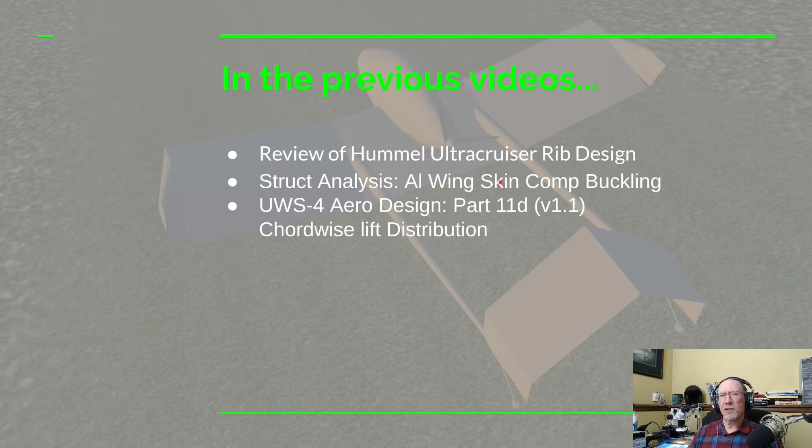And in that structural analysis video, we looked at the skin compression loading, what it can handle, and buckling load for an aluminum skin right at the spar. I'll give you a link to this one when we talk about it a little more, because I actually pulled one of the slides out of there and put it in this one. Another video that we're going to be using a slide from is the UWS-4 Aero Design Part 11D. In that one, we talked about chordwise lift distribution or chordwise pressure distribution. When we start talking about that, I'll put a link up here in the upper right-hand corner.

Now for the purposes of our analysis, we're going to assume that the loads that the skins are encountering are being transferred to the rib and then from the rib to the spar. Now it's not quite strictly true. Some of the skin loads here near the spar are going to be transferred directly to the spar. But to be conservative, we're going to assume they go to the rib and then to the spar.

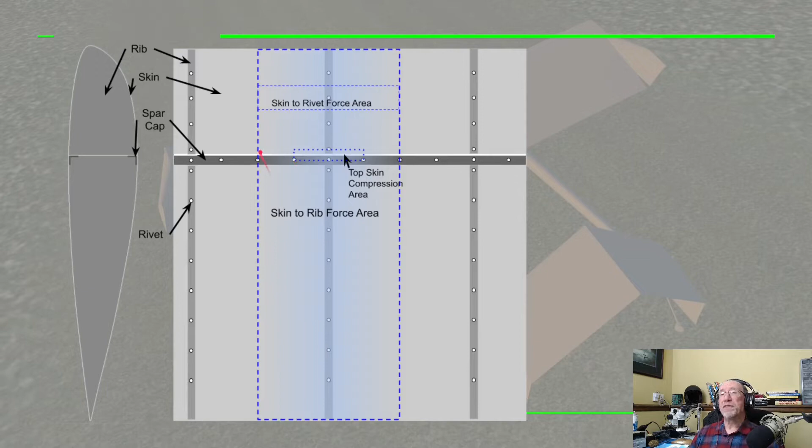So what we need to do is figure out the distance between this rivet that goes through the spar cap and the next one out on the nose rib, and in the other direction out to the main rib. How far apart can we put those and still have that skin carry that compression load? So that'll be one of the distances we're going to figure out.

Now another distance we need to figure out on these rivets is out here on the ribs. Same thing on the main rib. We're going to have more rivets out here. So what's the distance going to be between those rivets? What's going to determine that distance is from another video I forgot to mention before.

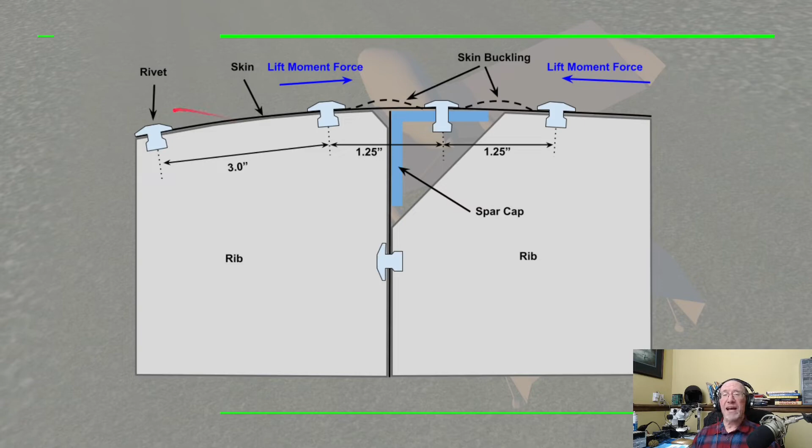In brief, there's going to be suction on the top of this rib up here. And so that suction force is going to try to lift up. That force is going to have to be transferred to the rivet into a flange on the ribs. Now, the farther apart these rivets are, the more force each rivet's going to have to carry. And vice versa, the closer they are together, the less force they have to carry.

But the closer those rivets are together, the more rivets you have to put in the wing, so that adds more work and a little more weight too. So we like to have those rivets about as far apart as we can get them. Now, what we want to do is consider the worst case scenario on the load on this skin. So let's talk about that.

Now that brings us to another video that led into this one, and that's the chord-wise lift and pressure distribution.

Now the 117 falls in between these two, and it's almost the same as this one. So the 3-inch, I'm not comfortable. I don't think that'll work at all, because I'm guessing that compression that we can handle is probably around 70 pounds, probably something like that. So that's not good enough.

So what I want to do is try a 2-inch spacing and then do some testing to see if that will work. It's in between these two, kind of in the mid area, a little bit lower than midway. So I'm guessing that's going to work. So I'm going to do some testing to verify that, but we're going to try 2-inch spacing.

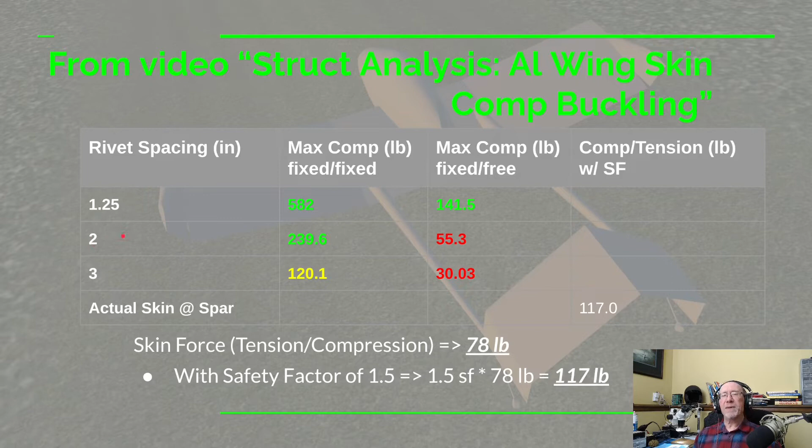So we've got part of our answer now. So the spacing from this rivet to this rivet will be 2 inches, and from this rivet to this rivet will be 2 inches. So we at least figured out 2 of our other rivet holes. I know where this rivet's going to be. I guess I should mention that.

So in order to be able to handle about a 3/4 inch top flange, I'm going to put this rivet 3/8 of an inch from this edge here where the web is. So there'll be 3/8 from the middle of this rivet hole to this edge of the angle. So I know where this rivet will be, this rivet, and this rivet, at least in our first test article. Well, now let's work on this rivet span out here.

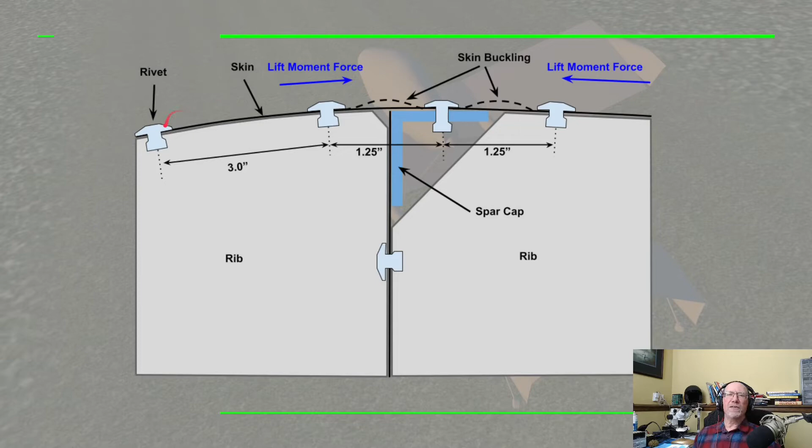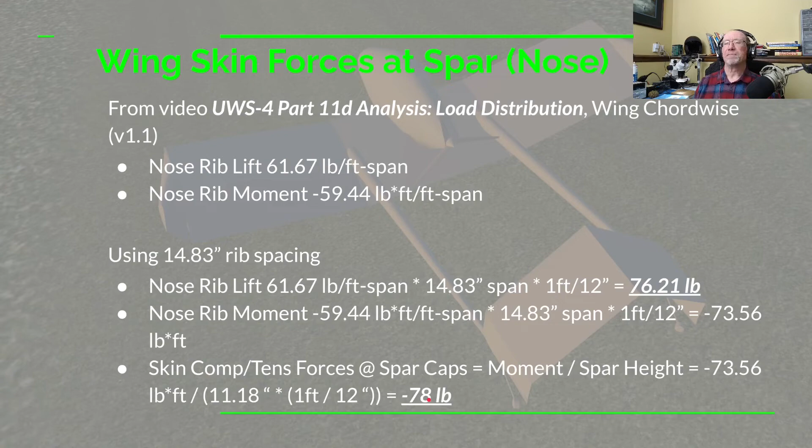And just to be complete, I did it for the main rib and the flaps too. And one thing about the flaps: loads are transferred to the wing at the rear spar through a hinge. So that means more than just that rivet bay spacing comes into account for the flap. So you actually have to take half of the flap span into account and load that into one of the hinges. And of course, those hinges are going to be placed at a rib. So those particular ribs are going to take a little bit more load due to flaps and ailerons.

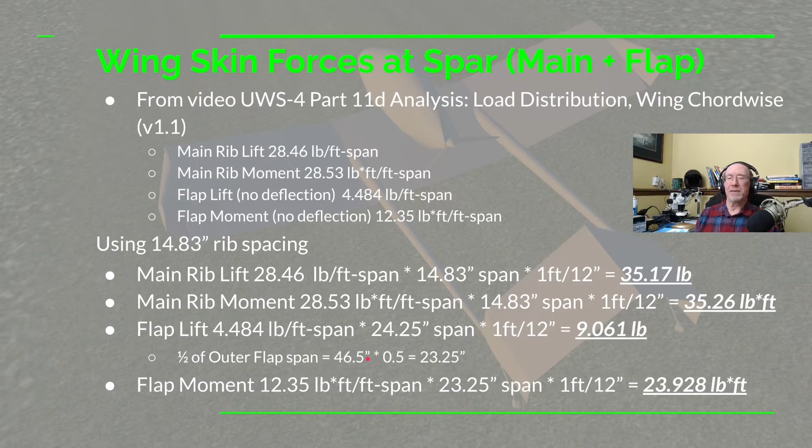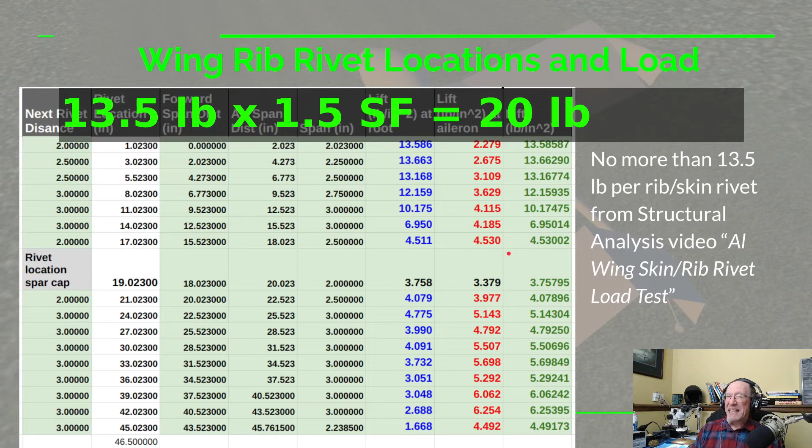You may remember from a recent video that I did, aluminum wingskin rib rivet load test, where I figured out that I didn't like putting more than 13.5 pounds of load on a rivet because it would permanently deform the rivet hole in the rib flange. But I was going to allow up to 20 pounds to just slightly deform it, which is allowed under Part 23.

Now I did all my chordwise load and pressure distributions in a spreadsheet. So it made it pretty easy to also use that same spreadsheet to figure out how far apart should I put those rivets in the rib skin junction. So that's what this table here is representing. So I have a rivet location that I already know. That's going to be that rivet that goes into the spar cap. Now it's at roughly 19 inches away from the leading edge of the rib. So everything else goes from that.

So the next two rivets out, fore and aft, would be 2 inches away. And that's because of the skin compression load. So I already know where those two are, 17 inches and 21 inches. But now I need to figure out what the rest of these rivets are going to be.

So this column here, as you probably already figured out, this is the location of the rivets. Now this is the horizontal location. So that'd be the X direction, distance from the leading edge. It doesn't have anything to do with the vertical direction. This is the distance between the rivets, and I'll kind of ignore the rest of these columns here just to help me out in doing my calculations.

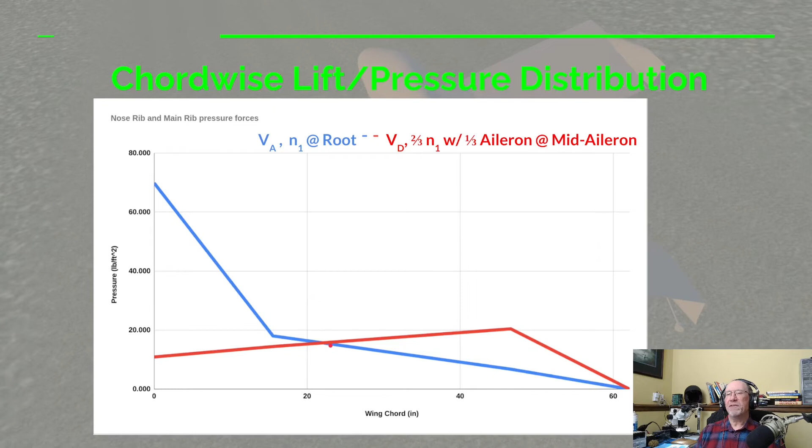But this blue column represents the loads from this blue line. And this red column is this red line here. So what I want to do is take the maximum load from this line back to here, and then from this red line back to the trailing edge. So I did all the calculations, and then this column is the max out of these two.

So what I did is I just manually played around with rivet placements. So you can see I got up to just a little bit over 13.5 pounds here on this first rivet, and it's only 1 inch back from the leading edge. So on the next rivet back, it's 2.5 inches back, and then all the rest of these are underneath. Now I only went to 3-inch spacing on all these, and this goes back roughly to the aft spar.

Now I only did a maximum of 3-inch spacing. I could have easily gone back to 4-inch spacing except for this one. These could have all gone up to 4-inch spacing with no problems, and I would have easily stayed underneath my 13 pounds per rivet. I think for now I'm going to stick with 3-inch spacing. Now 3-inch spacing is what Morry Hummel used on his ribs on the Ultra Cruiser. I decided to go a little bit closer together up here near the nose. And then, of course, right here at the spar cap. So I at least have some tentative rivet locations for the ribs.

Now this is going to allow me to use the same exact rivet locations throughout the wing. Now out at the tip, I could actually do a wider spacing out here on the nose because we're going to have less load out on the tip. If you remember on span loading, your span load drops down to 0 out at the tip. So we could easily do with far fewer rivets out at the tip if we wanted to.

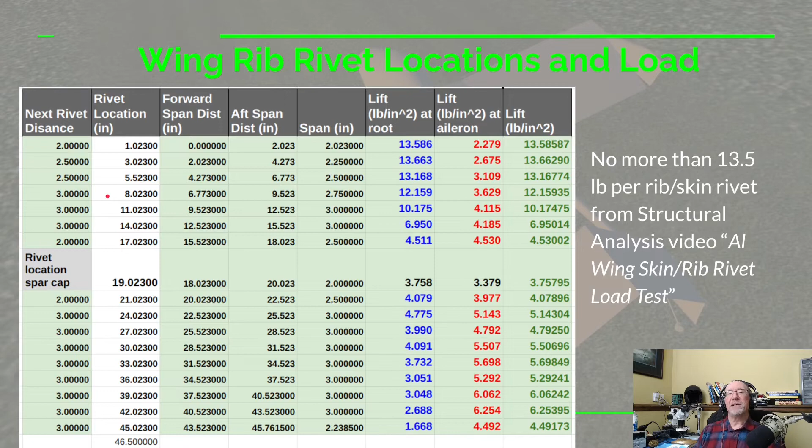So I at least have some tentative locations for the rivets and the skins going into the ribs, but what about here at the shear web? We're going to have some rivets carrying this lift load of the nose rib and the main rib into the shear web of the spar. So there's going to have to be some rivets to carry that load.

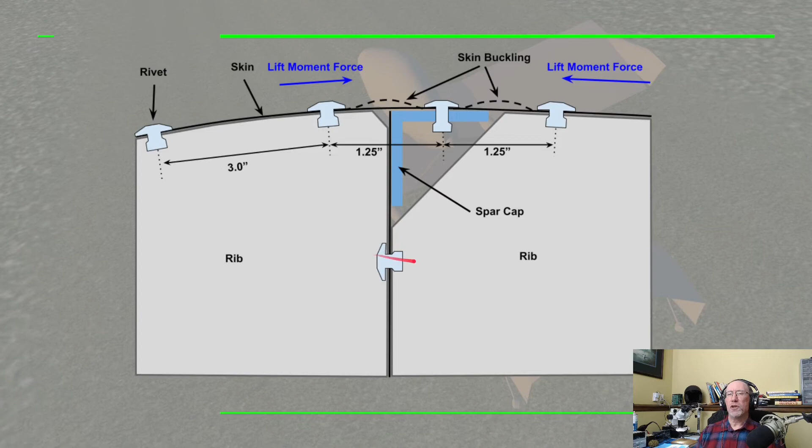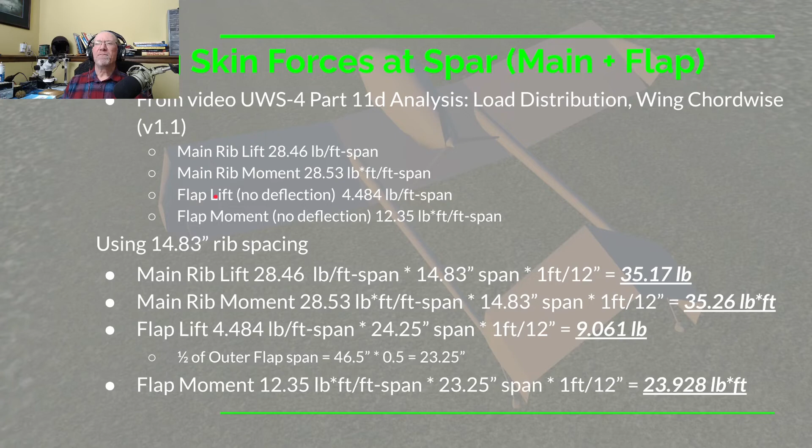Now remember back up here where I calculated main rib lift, flap lift, and I also calculated previously nose rib lift. We're going to need those now to calculate those shear numbers at the shear web. So that's where we are here. Add in nose rib, main rib, and flap lift. And that's going to be at our maneuvering speed at N1, 3.8 Gs.

So I pulled those numbers out, added them up, added in a safety factor of 1.5. That's 180 pounds that we have to carry from a rib into the shear web. And that's worst case. As you move farther out on the wing, it gets less. But as I said, I prefer to use the same rivet pattern as much as I could. I could potentially reduce the number of rivets as we move out, but I probably won't unless I run into a weight problem. So I'm thinking of using 1/8 inch diameter rivets.

So how much bearing, how much shear can those rivets handle? So let's do a calculation assuming 16 thousandths thick sheet aluminum. So hole diameter is 0.125. So that cross-sectional area of that hole is 0.002 square inches. Now the sheet metal bearing strength is 73,000 pounds per square inch. And that's assuming that our nearest edge is at least twice the diameter of our hole.

We include this number, and we get that that hole should be able to handle 146 pounds of force. Well, our force is 180, so we're going to have at least 2 rivets. And then also the shear strength of the rivets is 140 pounds. So again, we're going to need at least 2 rivets.

So we have other issues we need to think about on these rivets. Now we're not going to do it in this video, that'll be another video, but at least we're narrowing down the problems that we have to solve.

Another thing to think about is that the aerodynamic center of the wing is not always at the spar. It could be after the spar, and I guess it could possibly be in front of the spar too. Well, that's going to impart a twisting moment to that skin, and that has to be transferred into those ribs. And so the rivets have to handle that too. And we didn't include that in this analysis.

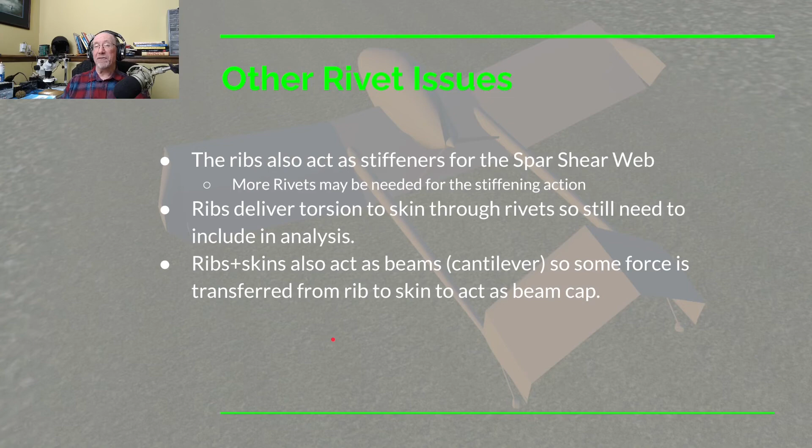So there's more we need to think about, but we at least have an initial analysis for placing those rivets, and then we can add some more forces in as we get to those to see if we still have plenty of margin. I think we're going to have plenty of margin. For example, most of the forces that we've just talked about, the extra issues to think about, are going to apply shear to these rivets. The calculations I did so far on these are pull, tension on these rivets. So shear would be in a different direction.

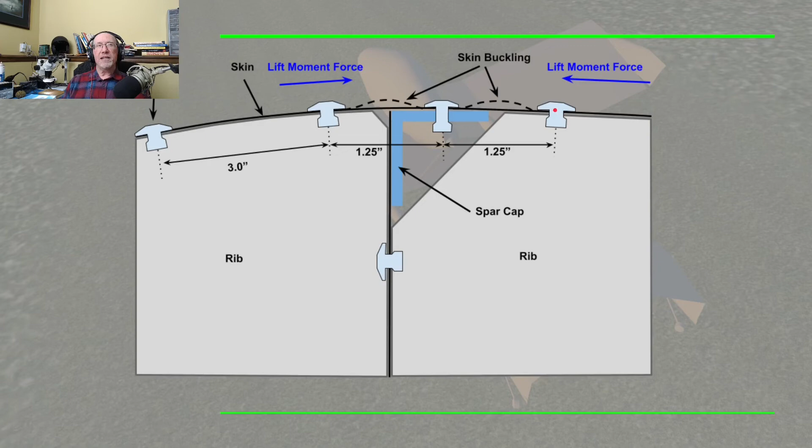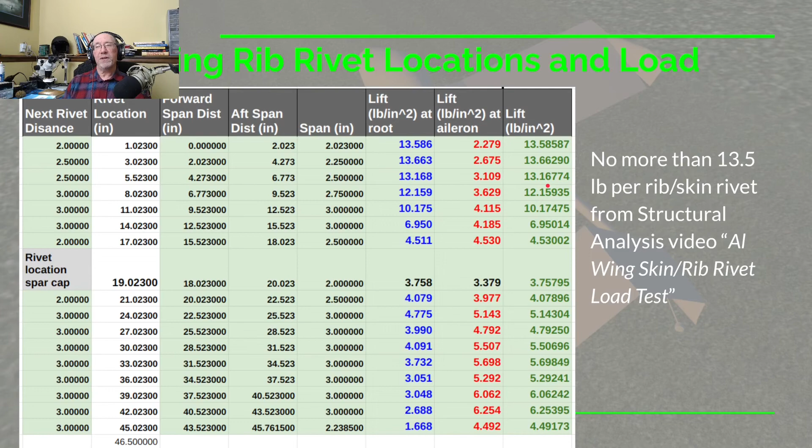Now the rivets themselves can handle 140 pounds. The skin is 16 thousandths. Now the skin, we know, can handle a bearing strength of 140 pounds also. So that's quite a bit that each rivet can handle. So look at how many rivets we have aft of the spar. There's a lot of rivets. So 140 pounds times each one of these rivets, that's a lot of force we can handle. And in front of the spar also, that's quite a few rivets, and that's a lot of force those combined rivets can handle too in shear, so I don't think it's going to be an issue.

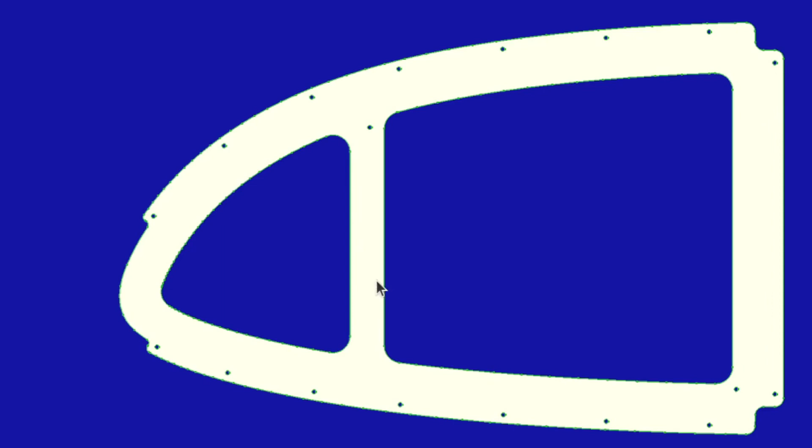I've only done the nose rib so far. I'll end up doing a main rib too. Let's look at a 3D image. So here is what a formed rib would look like. Now as you can see, what I'm currently planning to do on these inside flanges, they'll only be bent down about 30 degrees, or at least that's what I'm thinking of doing.

A couple things I haven't shown here. I haven't shown the actual hole locations in this flange just because it was kind of a pain to do. I'll have to do that later. In fact, I'm going to end up redoing this rib. That's one of the reasons I didn't bother putting the holes in here.

Another thing I haven't shown here is flutes. In between the rivet holes, we're going to have to put some flutes in here. Otherwise, this rib would have a huge bow in it after we bent the flange on the form due to this curvature. So I need to put those locations in. And there'll be flutes on the bottom. Of course, there aren't any flutes on a straight line bend.

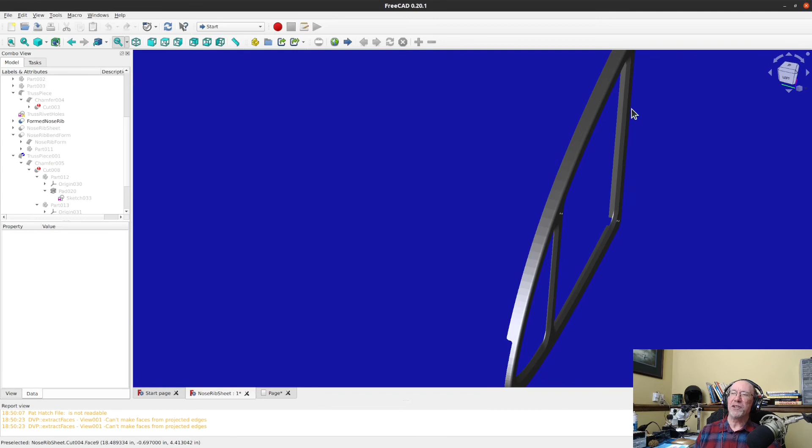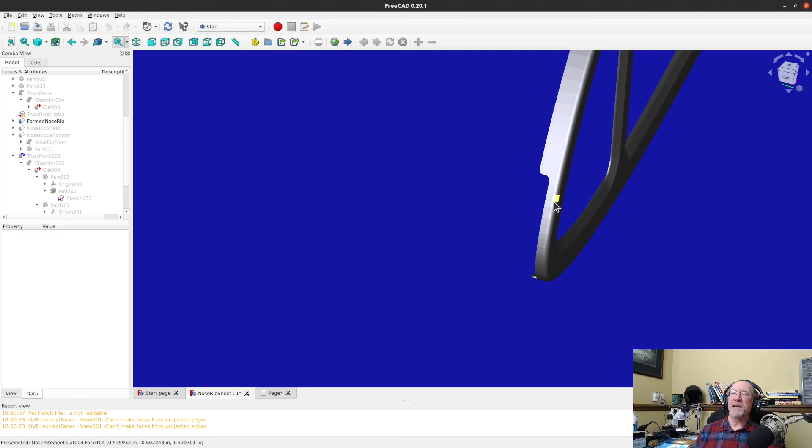And then again here on the nose, because there is such curvature right here on the nose, I don't want any rivets, and I don't want to put any flutes in it because you'd have to flute just about the whole thing. So I'm just going to remove some material here, and we'll just do a very slight bend over here at the nose. We could probably actually remove it, but I would like to have it in there to help hold the shape of the nose.

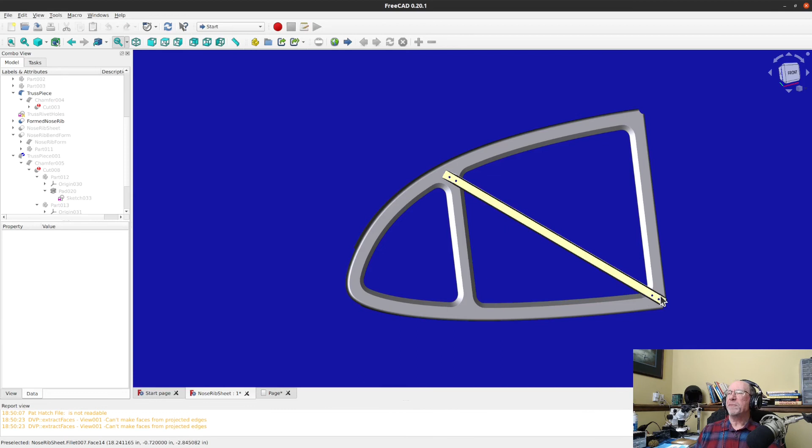And then there's one more thing I'm thinking about that I'll show you. I'm thinking of a hybrid rib between a fully formed flat rib and a truss style. So I'm thinking of possibly putting one truss piece here on the nose rib that will be riveted on. So I'd have to put a couple rivets here, a couple rivets here. So let's make that look like this. So flanges go one way. The flanges on this little truss piece here, which is basically U-shaped. Something like that. That's what I'm thinking.

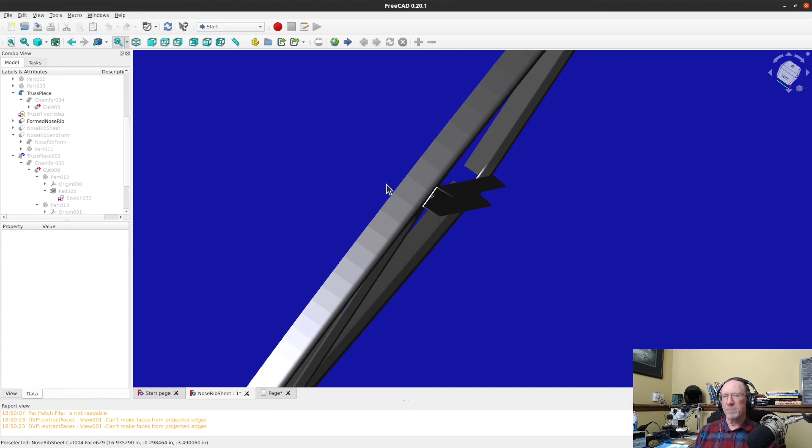Now the reason I'm doing that is because if I made this truss piece integral to the flat piece and bent it over like I did all these pieces, it added a whole lot of extra material in here to put some of these rounded curves in here. Here, here, and here, and here. And in fact, these curves are probably too sharp here. I don't know that yet. That's another test I'm going to have to deal with.

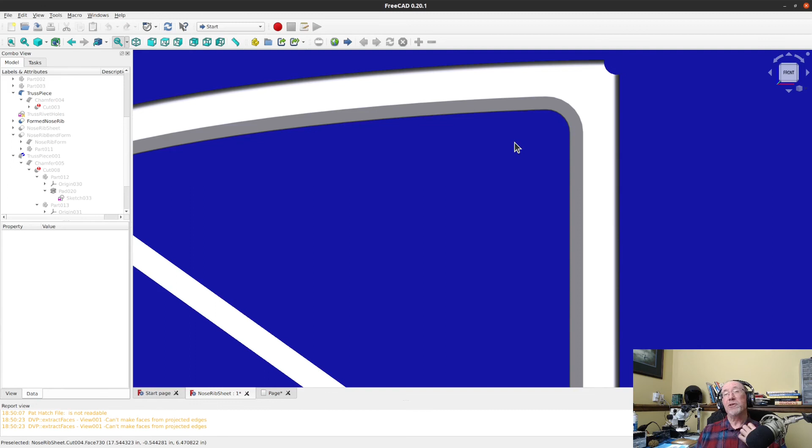If I can make a small enough radius, I guess I could go back to having this be all just one piece. Another drawback to having this truss here, in here it's only just one extra piece. Back on the main rib, it could be several extra truss pieces because there'll be several bays there that I'd want to put trusses in. So it's something I need to figure out.

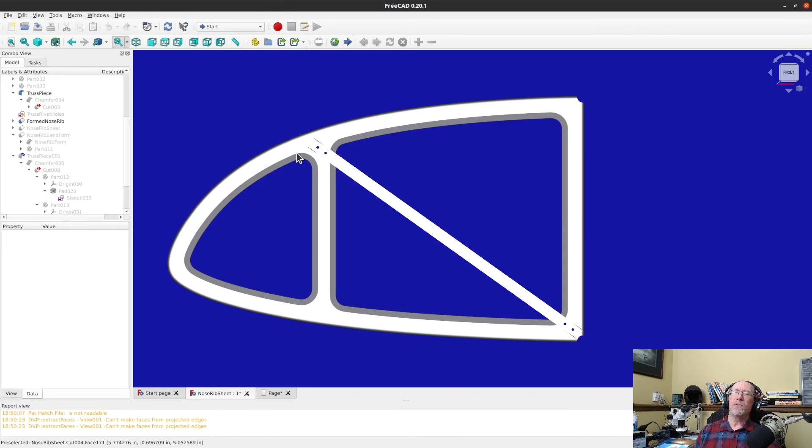Now, I mentioned in a previous video, I could try to make this cantilever, and maybe that will still work, but in order to do that, I probably have to make this wide piece here, this face, quite a bit wider back here, and then take it narrower as it comes frontward. So like I said, this interior is still up in the air. I don't know yet how I'm going to do it. I need to do some testing.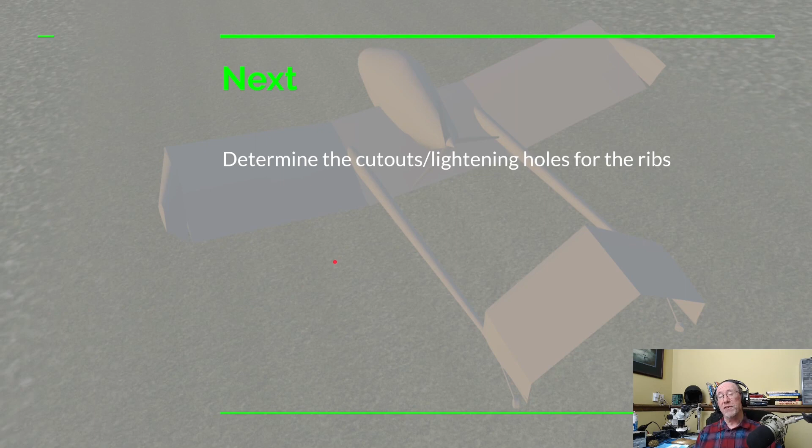So in this series, the next video will be determining the cutouts and lightening holes for the ribs. But before that happens, there's going to be some testing videos, some structural analysis testing videos.